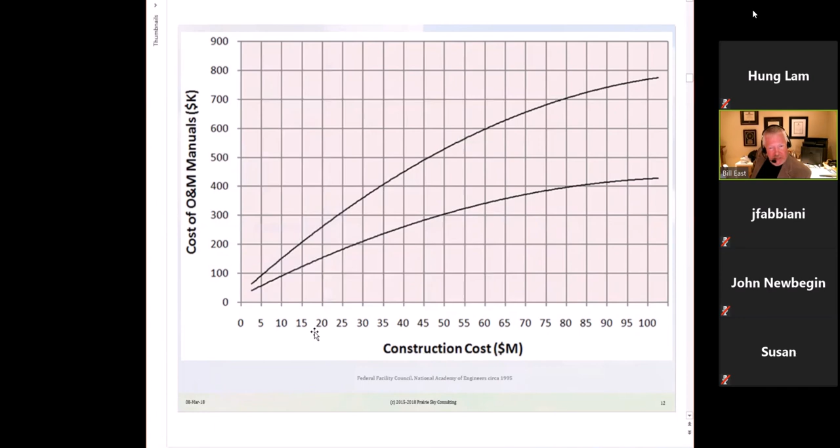It was staggering that was the comment, because this $400,000 is the tip of the iceberg — it's just the cost to make the paper. For one U.S. federal agency, they actually go and recollect the information again, because the information they get from the contractor they don't feel they can rely on. So the first thing that happens when they move into a building is they go do exactly the same thing again, on every building in their entire portfolio of many hundreds of buildings.

It's a tremendous waste of cost and human brainpower to do the job the way we currently do it. Of course, 3D building information modeling is supposed to change the world, and to some extent it has — specifically, 3D modeling is now used to produce the plan and elevation drawings we use for contract documents, and in fact it's extremely successful in doing so. On the design side, the numbers I've heard say it reduced the cost of producing construction drawings by 60%.

So what is the real value of BIM to an architect? It lets them fire draftsmen. That's the actual practical value. Now, in terms of the construction side, there's also tremendous value. The tremendous value of 3D modeling is that it allows you to do three-dimensional light tabling.

Back when I started, I would get a set of drawings and have to do what was called a constructability review. I would take the structural, architectural, and ductwork layout and put them all on a light table and line them up, circling the things where a duct was going through a column, or a pipe was going through a door opening, and all that kind of stuff.

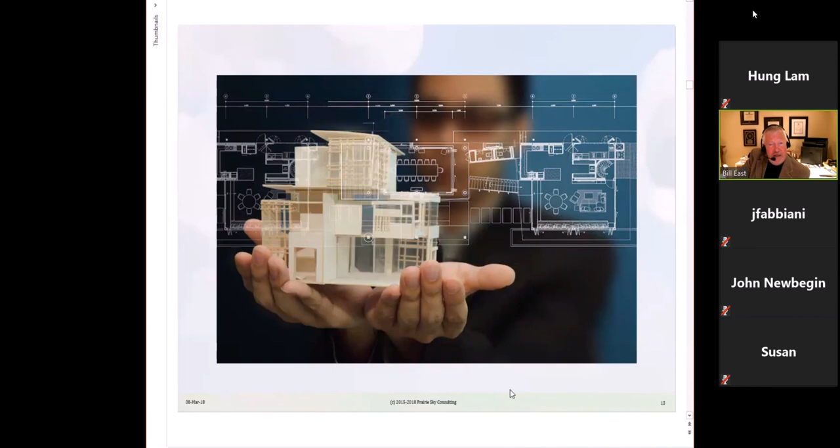So what we really have done is find a fancier way to quality control the documents we're already producing. This isn't too far of a stretch — we're still basically using the same tools and techniques everybody learned back when they were designing on drawings. It's just that they're three-dimensional now.

There's no substance. It's just a surface with some designation of texture. And my gosh, though, doesn't it look great, right?

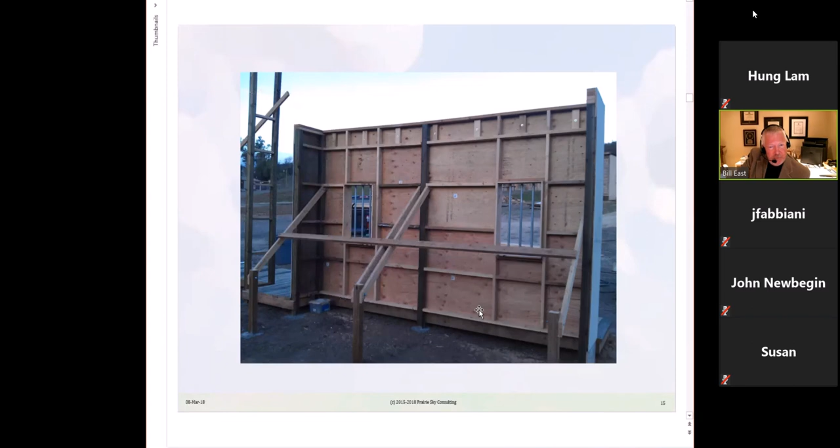Because we have a suspension of disbelief, it's quite easy for people looking at a Western movie set to think the whole town is there. That's what they call suspension of disbelief. You know the whole town is not there, but we just go along with it, and everybody agrees, well, it's great. But in reality, the buildings really look like this on the inside.

So what does that do for this great new technology for a guy like Lyle stuck in the basement with those boxes? What does he get instead? Well, what he gets, to the greatest extent possible, and the best use, is shoebox formatted BIM.

Well, actually, it's worse than having all the paper in the boiler rooms, because this guy retired, and now nobody knows where all of the BIM repository is for their facility, all of their facilities.

So let's assume for a second that we were going to try and do something about this. Let's see how the structure of our industry almost prohibits progress in this area.

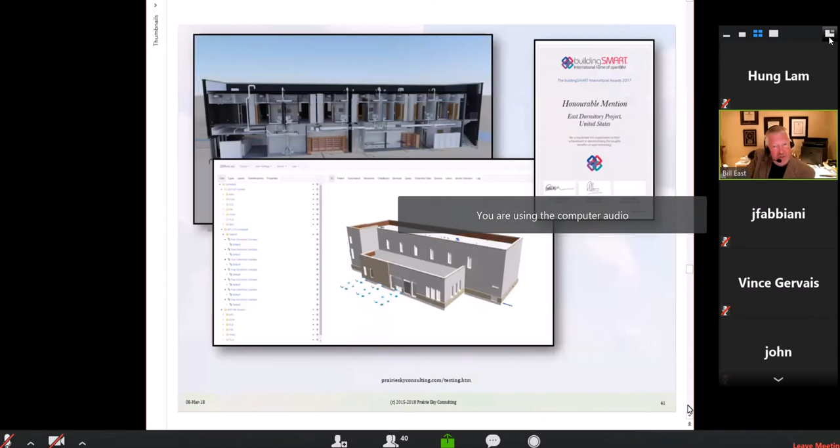You can find it under my company's website and under testing. And again, anybody can use this for free, but you can't make changes to it and then redistribute it, right? You have to get it from the original source.

Okay, so this test model was used by real architects and engineers to develop how-to books. And the size of the books is really sort of representative of the actual size of the books. There's no priority, right? The one on the left is 8.5 by 11, and the one on the right is 6 by 9 inches in size.

So we use this new test model, and for the ArchiCAD book, which was first, some of you probably know the COBinator, Rob Jackson in the UK. He actually did the blow-by-blow about how to do COBie correctly out of ArchiCAD. And ArchiCAD doesn't actually produce COBie files. What it does is it produces IFC coordination views that have been extended to include the COBie data from designers. And then you have to use a third-party software to extract that COBie data if you want the COBie data only. For example, if you want to give the COBie spreadsheet to a contractor, you can't use ArchiCAD directly.

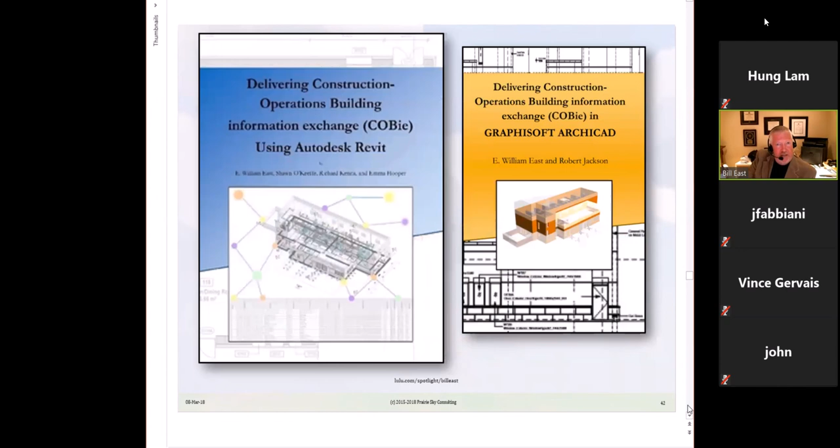While some people do more, most people are really just satisfied with getting the spreadsheet export. What we did with the one on the left-hand side is we actually got every discipline individually to 100% compliant COBie files, and you can see those on the testing site. You can download them, reproduce the test project, get the book and figure out how to do it yourself, and I can guarantee this will save you a tremendous amount of time.

Now, if you're an owner, how should you be thinking about specifying COBie? Well, the way I think about specifying any deliverable in a contract, having worked as a government contract project manager in the construction and R&D side for 35 years, every good requirement has three parts in the US.

It has a code, and that's the COBie standard. It has a commentary that tells you how to apply the code under different circumstances. The commentary in US practice for COBie was published in 2012, and updated maybe one more time. It's called the COBie Guide. The COBie Guide says it's great that we have the standard, but we also want to check it against a specific project. So the rule is the data has to match the drawings. It's as simple as that. That's really what the COBie Guide says.

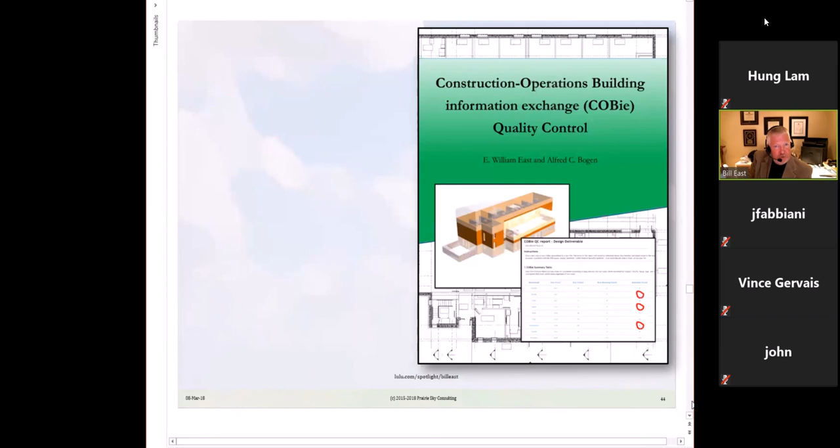These are open source pieces of software, meaning anybody can make changes, create a branch, copy the code over, make a change, and post it back. So far we haven't had a lot of engagement in that, but many people have downloaded and used these successfully in projects. Because they're free open source software, we spent all our time working on the actual code to do the checking of the files, not on making a fancy user interface. So if you're unfamiliar with Java programming and open source software, just buy the book, which has step-by-step instructions to install this on Apple, Mac, or Microsoft computers. The full set of instructions are there, and I think you'll find this very helpful.

The standard specification actually requires that every COBie deliverable be accompanied by one of these reports. The software is free, so go use it and check your files. Other people claim to have file checking software, but it's never been verified by my programmer and me that it actually does exactly what's in the standard. Who knows what it does?

It's never been used to officially, formally test products against the standard.